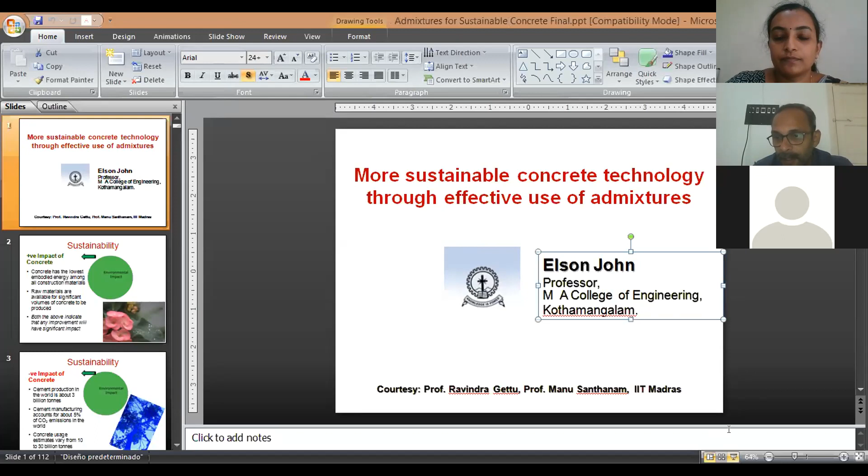Okay, thank you, Babila, for your kind words. Respected head of the department, Manju George, all other dignitaries present, and dear participants. Let me first thank MBITS College, Kothamangalam, for giving me an opportunity to interact with you. I was always in contact with MBITS for many such programs, and I do appreciate the Civil Engineering Department of MBITS for coming up with lots of programs and innovative ideas to develop knowledge in the civil area. I personally congratulate the Civil Engineering Department and the head of the department for the same. I know it's not only because of the HOD alone that we can do something, there's a team behind this, so I congratulate all the faculty of the Department of Civil Engineering for that.

So last 3 days you've been talking about sustainable development, right? Whenever we talk about civil engineering, everyone is talking about sustainability now. What is sustainability? You are already very well aware of it, so I'm not going to go much into that. During these interactions you might have known that sustainability has 3 sides or 3 components. Let us see how concrete affects these 3 components. It's a big challenge for me to keep you awake till 3:15 p.m. today after lunch, so in between I can see your names and some are very familiar to me, so I will ask some questions. If you are not responding, I will call your names.

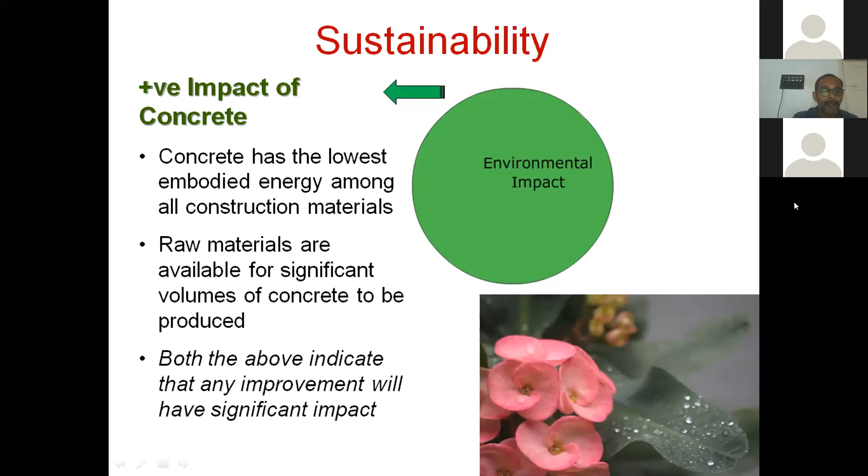So how can these admixtures help in achieving this? That's the discussion today. Then, what is the negative impact of concrete on environment?

As all of you know, cement production will lead to a lot of environmental issues. Cement production in the world is around 3 billion tons. And cement manufacturing accounts for about 5% of CO2 emissions in the world. Almost 1 kg of cement will produce 0.8 to 0.9 kg of carbon dioxide. So that much carbon dioxide is produced.

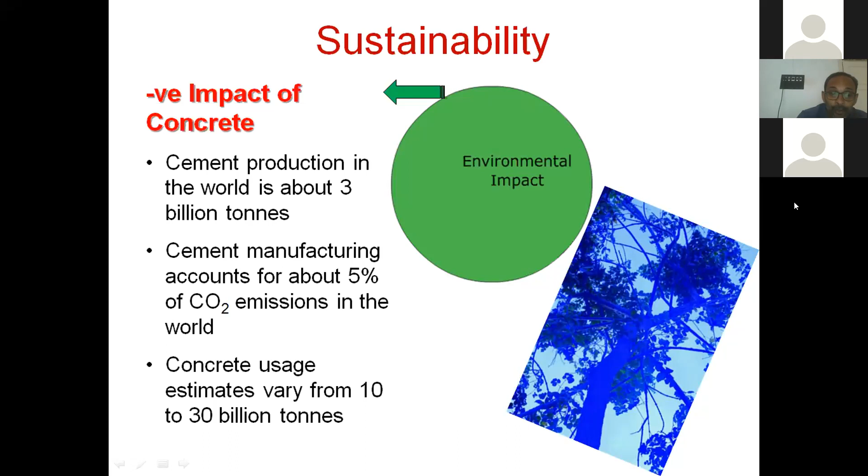So if you can reduce the consumption of cement, not only can we save the raw materials, but we can directly reduce the emission of carbon dioxide to the atmosphere. So that can lead to environmental issues. How that can be possible? Let us discuss. Then, concrete usage estimates vary from 10 to 30 billion tons per year.

Now let us come to the economic part. What is the positive impact of concrete on the economy? Construction provides livelihood to a large percentage of the population. Almost all our houses are made of concrete, or wherever we are thinking about infrastructure, we need concrete. So that is a positive impact—it gives livelihood to a large percentage of the population.

Then the growth of construction cost is also reasonable. Only 3 to 4% of construction spending is increasing per year.

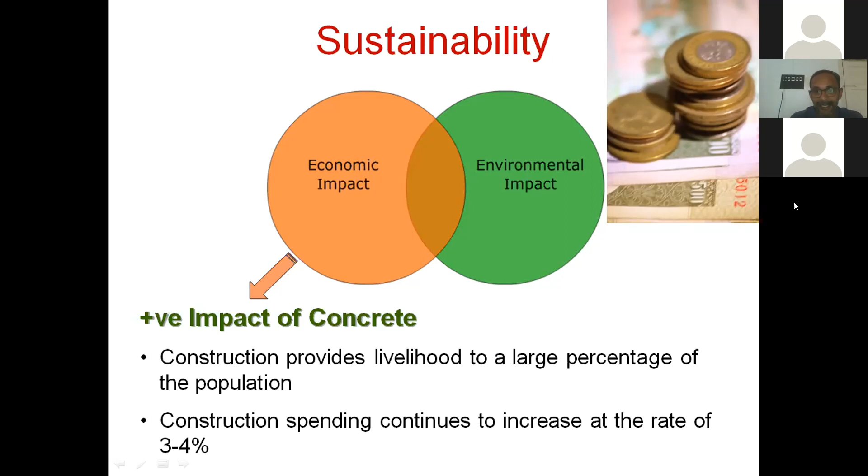Now, what is the negative impact of concrete? Poor construction with concrete can lead to high repair and rehabilitation costs. That we are seeing always in our structures. Almost all the structures we are facing difficulties or problems with.

We are designing a bridge for 100 years, or claiming that it will be sustained for 100 years. And we have an example in our neighborhood itself - a bridge was demolished after just 2.5 years of life cycle.

Why is that? There are lots of factors behind it. I'm not going to give examples or details about it. It may be the design, it may be the materials, it may be the methodology we followed for construction or construction techniques, but poor construction leads to a lot of repairs.

If we look at concrete structures, within a few years itself we are seeing a lot of cracking, spalling, all these things. Concrete is a durable material, no doubt about that. But we are making the concrete less durable and causing our structures to corrode, spall, and fail. So that is a negative impact.

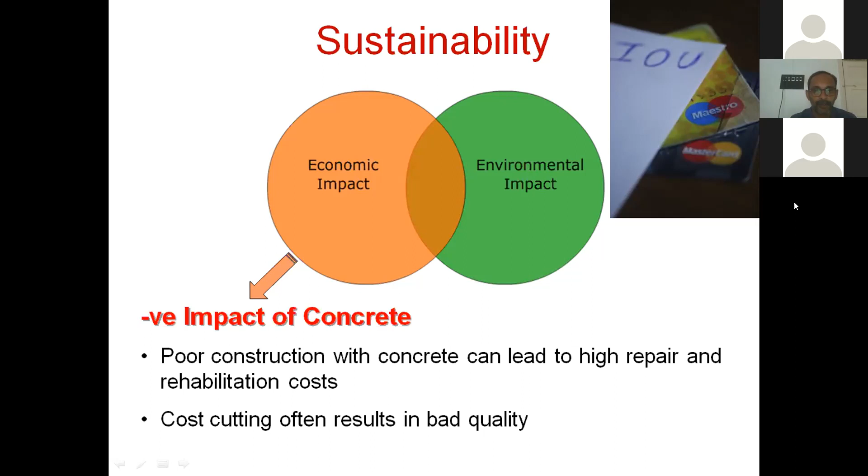Now, coming to social impact, the positive side - concrete is a long-term investment that is within reach for most. We are making structures. We have ancient structures which have withstood 100 or 200 years without any damage. And still, we can design a structure with a black and white guarantee that it will last long for 100 years. We can give that guarantee. There is a design procedure for that.

Life cycle prediction of structures - we can say that if the concrete has this much quality, the building will sustain for 100 years. Normally, the buildings we are designing for 50 or 60 years.

And how is durability ensured in our structure? Our IS code gives some points for that: minimum cement content to be used, maximum cement content to be used, maximum water-cement ratio to be followed, minimum grade of concrete to be used for various exposure conditions, and the clear cover. These are the things mentioned in IS 456 for making the structure durable.

But is it sufficient? If you follow this, it is sufficiently good. But if you are going for 100 years of life span for a structure, is it sufficient? It is not. We are specifying for a beam a clear cover of 25 mm. Why is it specified as 25 mm?

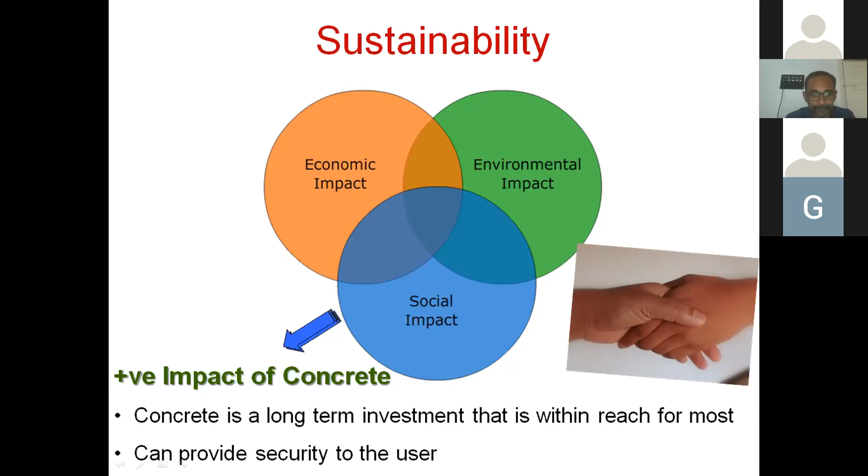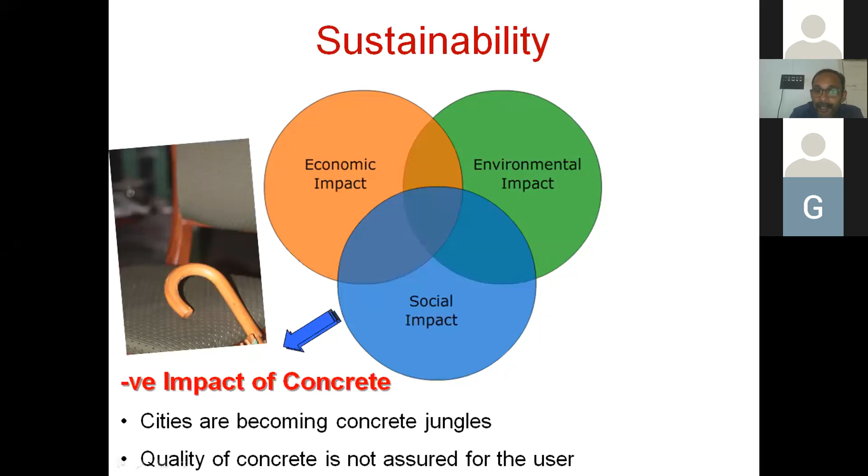So it can provide security to the users. Then what is the negative impact of the social component? Cities are becoming concrete jungles, as you can see in almost all our modern cities. During a sunny day, the concrete will absorb the heat and release it, so the temperature also increases a little bit. Then again, quality of concrete is not assured for the user. So that led to lots of issues in the concrete.

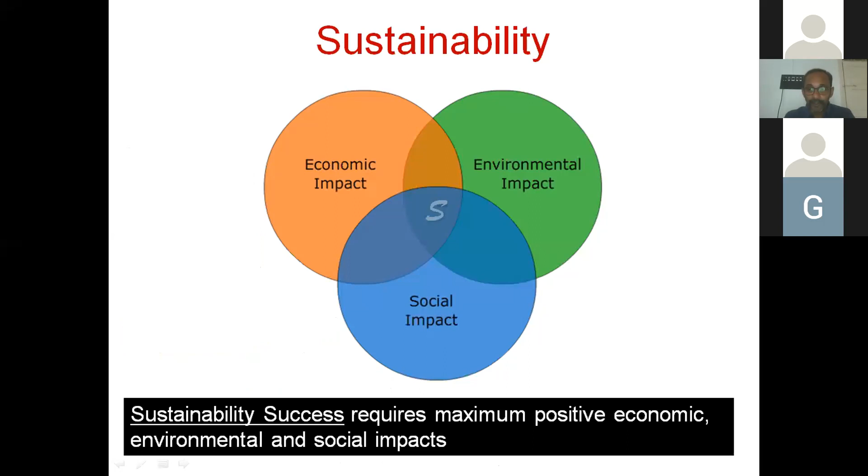So sustainability success requires maximum positive economic, environmental, and social impact. All these positive impacts should be the maximum. So the simple principle for concrete construction for sustainability is use less raw materials and energy over the whole life. So can anybody say how you can reduce the raw material for concrete by using an admixture? Anybody, if you can suggest? Okay, we don't want to spend time, I will tell.

So, for example, we are designing a column with M20 grade of concrete, and we get a cross-sectional area. At the same time, if we design the same column with M60 or M50 grade of concrete, we will arrive at a lower cross-sectional area. There should be some minimum dimensions for all those. But for multi-story buildings, if you want to make a high grade concrete, we need low water cement ratio and filler or supplementary cementitious material. So those are the admixtures.

So designing the same column with M60 grade of concrete, we can reduce the area by 1/3. So we need only 1/3 of concrete. That gives a saving in the raw materials, energy to mine it, process it, transport it, mix it, place it, all the things. We can go for a reduced cross-sectional area with the help of admixtures. Then reduce the emissions: when you reduce the quantity of material, we can reduce the carbon dioxide emission, because we need only 1/3 cement.

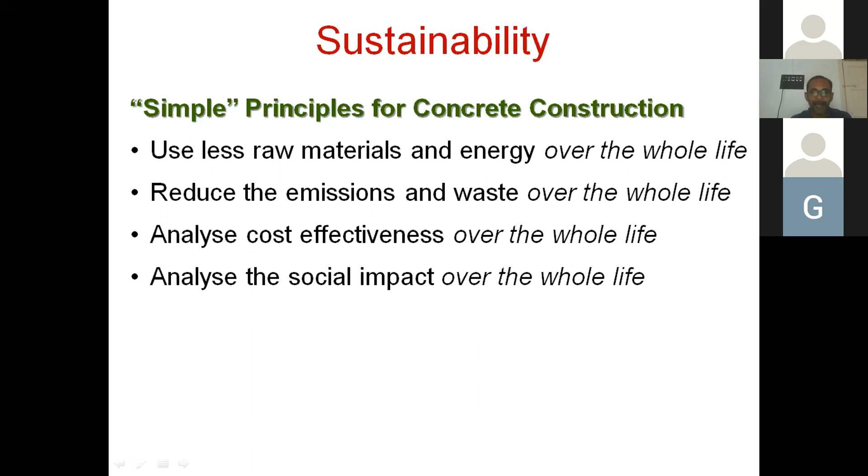Again, when you are going for a bigger cross section, after the useful life of the structure, we want to demolish it and dump the waste somewhere. So again, that needs more energy, space, and creates problems. When we talk about sustainability, it should be over the whole life of the structure, not the initial cost. Then analyze cost effectiveness, then analyze the social impact factor as we discussed earlier.

Use less clinker and water and more waste material. I told you how we can reduce the clinker. Go for high strength concrete. And for normal concrete, M20 concrete, our practice in Kerala is to use around 360 to 400 kg per m3, where you can use 200 or 220 kg of cement and 80 or 90 kg of fly ash to get M20 grade of concrete. So what is the advantage?

The raw material for cement manufacturing can be saved. The energy required to produce the cement can be saved. Transportation, everything can be reduced. And at the same time, we can effectively use a mineral admixture or an industrial waste material to make the concrete. So we can reduce the consumption of raw material, reduce the carbon dioxide emission, and use a waste material. Otherwise, that will go for landfilling.

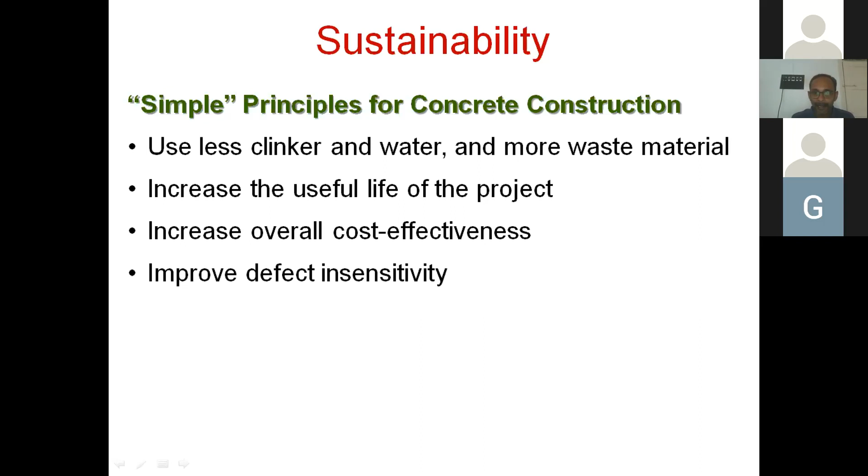That can lead to dust, and the heavy metals can leach to the groundwater and contaminate it. So air, land, and water pollution can be avoided. Then increase the useful life of the project. That's what I told you. Instead of 50 years, you have to make a structure which will withstand 150 or 200 years. Then overall cost effectiveness, of course, we have to consider. Then improve the defect insensitivity. Our structure should be intact and without any defects.

So admixtures in concrete. The time is flying, so I will just give you only the important points. So what's an admixture and why do we need it? To get sustainability in concrete, we need high quality concrete. High quality is not only high strength, but high performance also. We can achieve this by using alternative or unconventional materials because the industrial requirements are changing nowadays.

Earlier, we were talking about 50 or 60 mm slump because concreting, placing, compacting, finishing, everything was manual. Now we are talking about ready-mix concrete. Your concrete is a call away, so it needs to be transported. But with the present traffic conditions, you don't know when your concrete will reach your site. Sometimes it may take 3 to 4 hours. So your concrete should be workable till that time without the initial set. So workability retention or slump retention, or sometimes we need high strength concrete.

Last year, one guy from a prefab unit came to me, and his demand was to get 20 Newton per mm square in 12 to 18 hours. I told him it's very easy. We can get it within 4 to 6 hours if you go for high quality accelerated curing techniques. But he told me that he doesn't want to go for a boiler and all those things. He wants to do it with admixtures. Can we do it? Yes, we can.

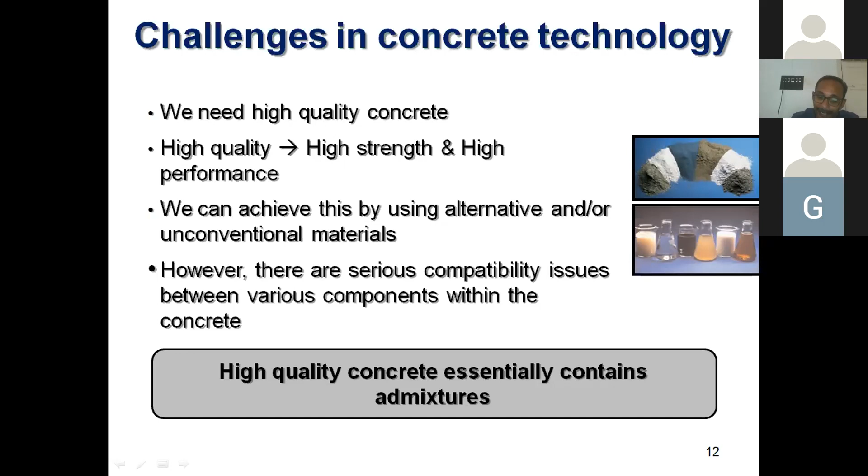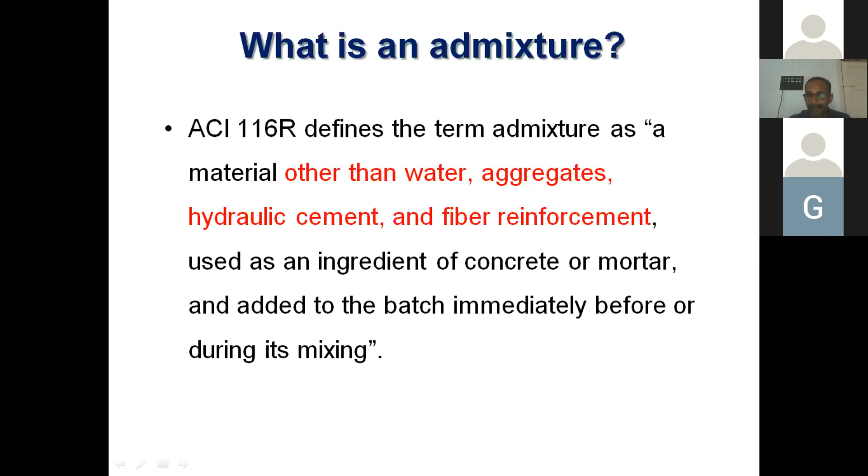We can make sure that for high quality concrete, high grade concrete, high performance concrete, we can enhance the service life of the structure. And that can be achieved with the help of admixtures. What's an admixture? According to ACI, the term admixture is a material other than water, aggregates, hydraulic cement, and fiber reinforcement used as an ingredient of concrete or mortar and added to the batch immediately before or during its mixing. No admixture should be added to the concrete once the concrete is prepared. It should be added immediately before or during its mixing.

Why use an admixture in concrete? To satisfy the growing demands of the society and the construction sector, to provide better stability under certain environmental conditions. Say you want to go for underwater concreting. You want your concrete to be more cohesive. You don't want the surrounding water to mix with your concrete. So you can go for a viscosity modifying admixture so that the cohesiveness of the concrete will be better and the surrounding water will not mix with the concrete. Like that, lots of admixtures are there. To increase the productivity or efficiency during fabrication, transporting, and placing. The capacity of the traditional materials to satisfy these demands is limited.

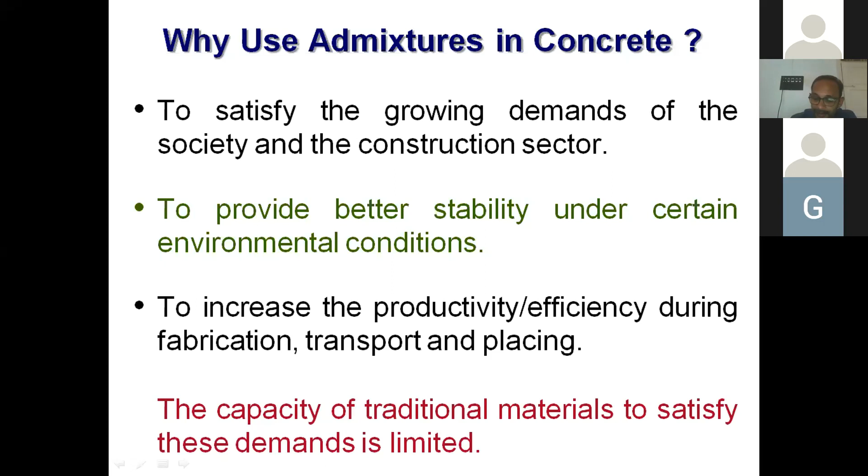So admixtures can be broadly divided into two. One is chemical admixture and the other one is mineral admixture.

I'm not going into detail about it because I want to wind it up within 15 minutes. So as per the restricted time, I am just rushing.

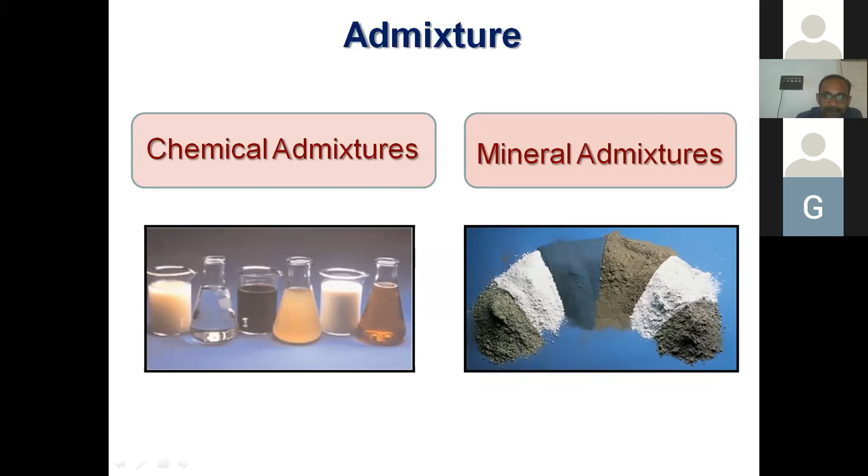Chemical admixtures, all of you know what a chemical admixture is. Chemical admixtures are chemicals which are added to the concrete to improve some of the properties of the concrete. Normally the dosage is less than 5% or maybe 2%. I always tell that the process of making concrete is just like cooking. We are making a dish, say veg kurma. You are cooking that at home, your mother is cooking, you are getting it from your canteen, you are getting it from a different hotel. But each of these will taste different. What makes the difference? The relative proportion of the materials.

Just like you are getting the raw materials of the concrete from the same source: from the same quarry you are getting the aggregate, the same brand of cement from the same batch, the same source for the water. If you are mixing from the same raw material, different manufacturers or designers can make the concrete in different ways with different quality, as our dishes taste different. So first importance is the relative proportions. And sometimes in our dish, if you want to add some taste, we use some spices. So admixtures in concrete are just like adding spices to improve some of the properties of the concrete.

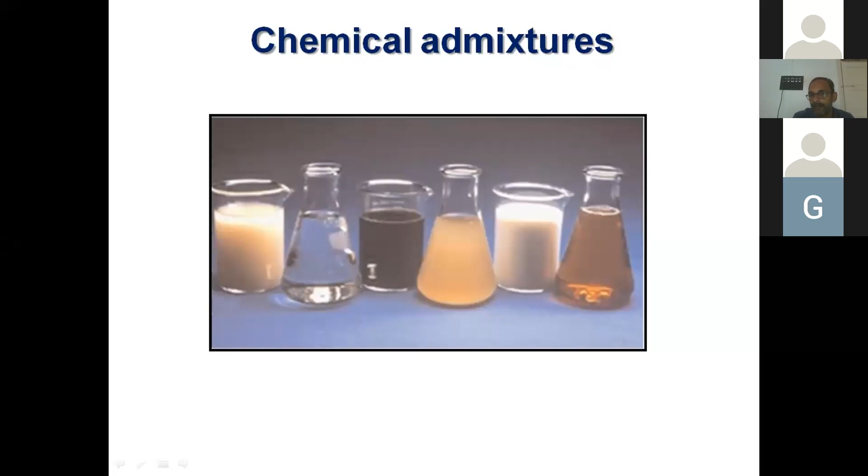When I'm talking about superplasticizer, it is just like adding salt to your dish. Without superplasticizer, you can't think about a quality concrete nowadays. But one thing you should be very careful about. If you add excess salt, what happens? You can't use your dish at all. You can't eat it. Same way, overdosing of admixtures can lead to segregation and bleeding in concrete. That is dangerous. If you add less salt to your dish, it won't taste good. Just like if your admixture is not of sufficient dosage, it will not work as we expect.

So when you are using admixtures, you should be very careful, because these admixtures are used for some purpose. Maybe it is to improve the workability; superplasticizer is added to improve the workability. Sometimes these admixtures have some secondary effects. Most superplasticizers will have a tendency to increase the setting time. We should be aware of that: how this admixture will influence the required property and how it can interfere with the other properties. That's all.

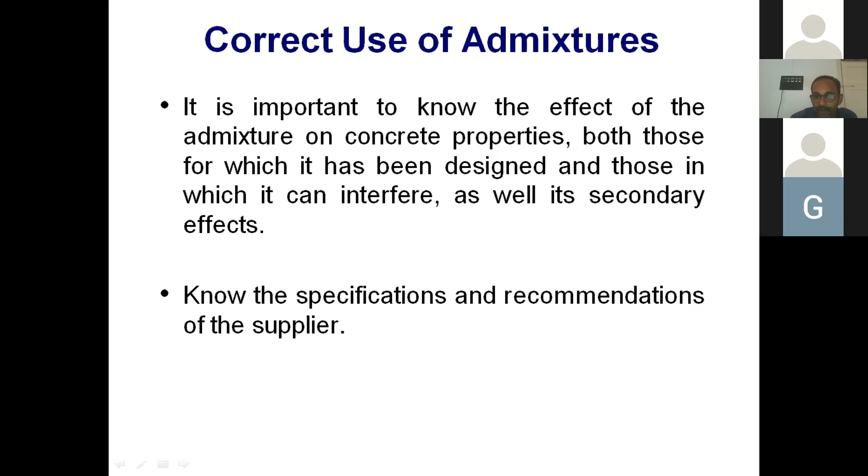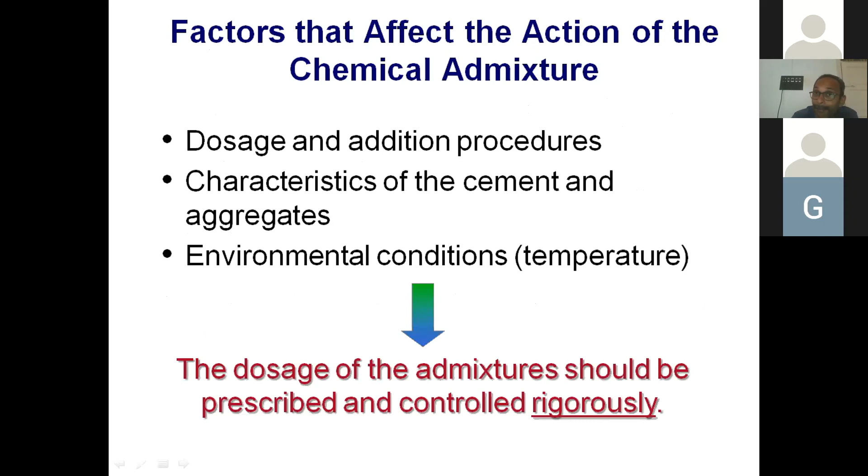So factors that affect the action of the chemical admixtures are dosage and addition process, characteristics of the cement and aggregate, environmental conditions. So the ambient temperature can influence the performance of the admixtures. So chemical admixtures, we can broadly classify into many groups. One is admixtures that mainly affect the fresh stage, water reducers and superplasticizers. I will talk about that two minutes later because that's the most important thing.

Then admixtures that mainly affect the setting stage. You can control the setting time of concrete. Sometimes you want to concrete underwater. So what you need is you want your concrete to set fast. Or you want to make your concrete in a cold climate. So temperature is an accelerator of the hydration reaction. So low temperature will decrease it. At lower temperature, concrete will not set for a long time. So that time you need to accelerate the setting. We can go for set accelerators.

Or you are going for prefabrication. You need your formwork to be removed early. You can't keep your formwork for 28 days for the next specimens to come. So we can go for set accelerators. Set retarders: you want to transport your concrete for a long time. You can use this admixture so that you can make your concrete workable for a long time.

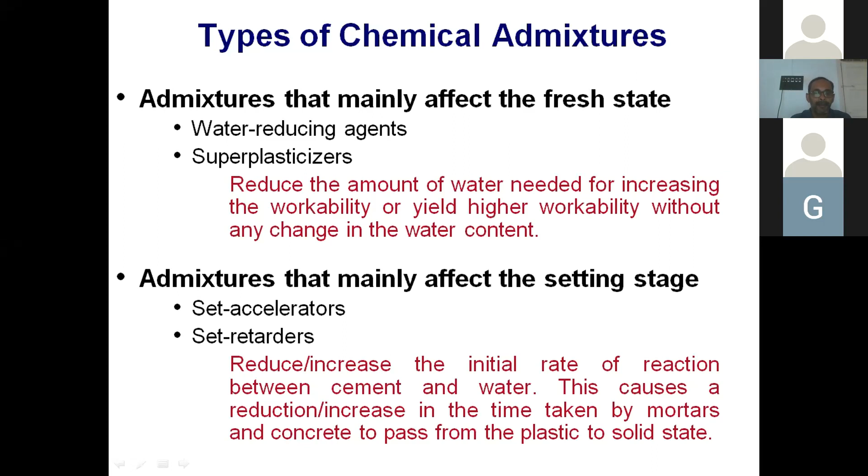If the ambient temperature is too high, concrete will set fast. You will not get sufficient time for the concrete to place and finish. We can go for a set retarder so that the setting time of the concrete will be delayed. You will get sufficient time for the concrete to place and finish.

Admixtures that mainly affect the hardening stage. I told you, we need a compressive strength of 20 MPa in 12 hours or 18 hours. We can go for hardening accelerators. Accelerators will only decrease the setting time. They will not increase the strength. But when you are going for a hardener, it will increase the initial strength.

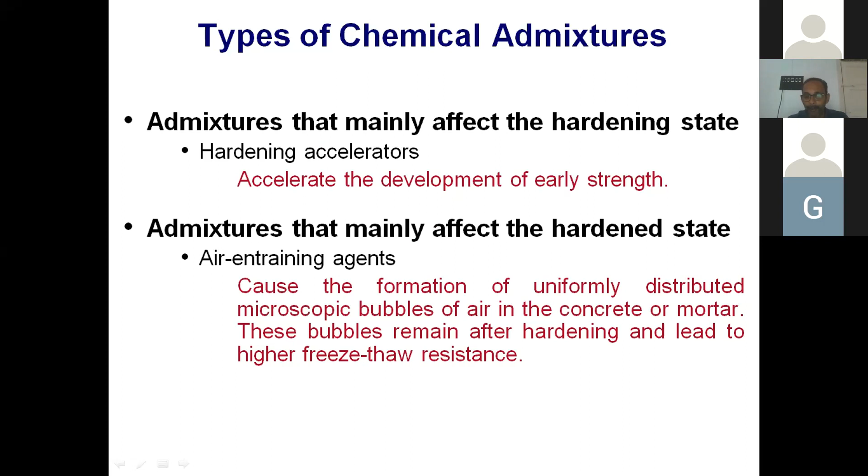Then admixtures that mainly affect the hardened stage, air entraining agents. They will entrain some air inside the concrete so that it will have better freeze-thaw resistance. I'm not going into details of that. In India or Kerala, we are using this air entraining agent to make lightweight concrete. What we are talking about, the AAC blocks and all, are air entrained concrete.

There are special purpose admixtures, shrinkage reducing admixture. So all of you know that concrete has a unique property of shrinkage. Even if it is protected from the atmosphere, it will shrink because of chemical shrinkage. In the hydration reaction, the volume of reactants is more than the volume of the product. So that can lead to shrinkage. So shrinkage is happening because of the removal of water from the pores. So this admixture will reduce the surface tension of the water so that removal of the water will be easy and it will reduce shrinkage.

Like that, we have alkali aggregate expansion reducing admixtures. We don't have such problems in India, but in some countries they are having a big issue with that. Then corrosion inhibitors. If you're adding these admixtures, they will make a passive layer on the surface of the reinforcement bars so that the entry of oxygen and moisture to the reacting sites will be prevented and the reinforcement will be protected against corrosion. That is one way of action. The second type of admixtures will prevent the entry of moisture into the concrete so that the reinforcement will not corrode. Then viscosity modifying agents, I already discussed.

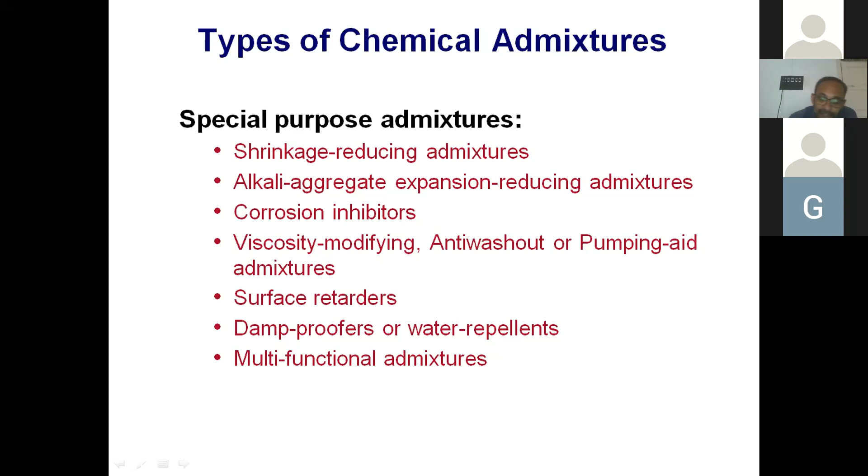Surface retarders. If you want to get an exposed aggregate finish, you just apply these surface retarders on the formwork, do the concreting, keep it for sufficient days. Only the surface mortar will not set. After removing the formwork, clean the surface with a jet of water, and you will get an exposed aggregate surface. Damp proofers or water repellents: micro or nano materials will be added. The purpose is to make the surface of the concrete just like a lotus leaf, so that durability issues can be reduced. Then multifunctional admixtures: one admixture will serve more than one purpose.

So superplasticizers, why are superplasticizers added to concrete? There are different ways to approach it. One, you have a concrete, say your concrete has a 50 mm slump. You want to increase this slump. So you can add a superplasticizer so that you can make this slump 100 or 150 or 200 mm. So, to increase the workability. But if I have a concrete with 100 mm slump, I am satisfied with that.

So if I am adding an admixture, superplasticizer, what will happen normally? The slump will increase, but I want only 100 mm slump. So for the same slump, I can reduce the water content or water cement ratio so that the workability will be the same. So for the same water content, we can increase the workability. Now for the same workability, we can reduce the water cement ratio.

So when the water cement ratio is reducing, what happens? We know Abrams' law: strength is inversely proportional to water cement ratio. When the water cement ratio is reducing, the strength will be increasing. So for the same cost, we will get a high strength concrete at a little additional cost of admixtures.

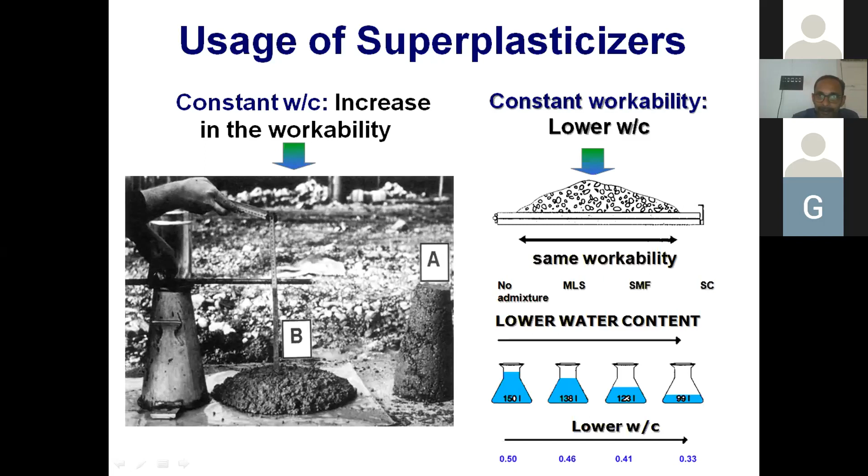When you are reducing the cement content, what is the advantage? The cost will be reduced, leading to sustainability. The production cement requirement is reducing so that carbon dioxide emission is reducing. Again, sustainability. The raw material required for the cement is reducing. Again, sustainability. So we can make the concrete more sustainable.

So mechanism of action, I am not talking much. Again, consequences of superplasticizer usage: it reduces placing and compaction time, leading to lower construction cost. Construction cost can be reduced. It facilitates casting of elements with complex shapes and dense reinforcement.

Otherwise, the reinforcement will not have sufficient workability. For example, self-compacting concrete will fill the complex shapes. Otherwise, there will be lots of honeycombs that can affect the durability, failure of the structure, and that can lead to less sustainability. It also improves surface finish.

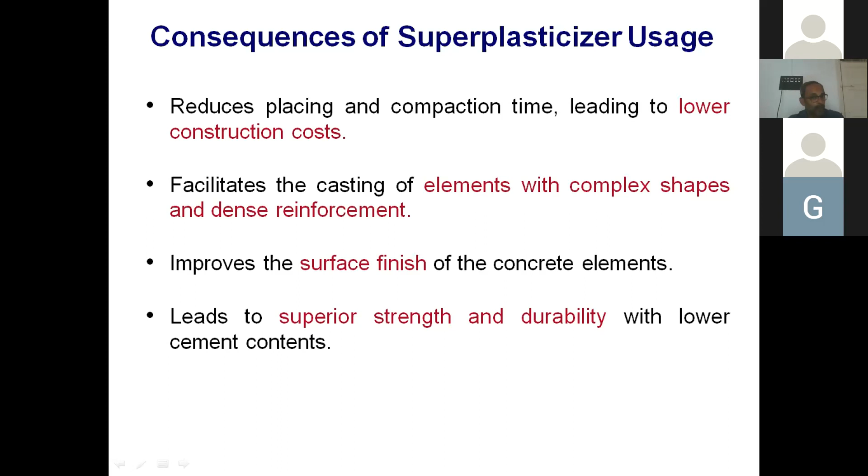Superior strength and durability. How is superior strength achieved? Because of the lower water cement ratio. How will durability be improved? That will be explained by this figure.

So what happened? Some part of that water will be taken for hydration. The remaining water will remain as water itself in the pores. When it is exposed to the atmosphere, this water will evaporate, leaving pores inside the concrete. All the detrimental components, chloride, moisture, oxygen, everything will percolate through that porous structure, reach the reinforcement, and corrosion will take place. Or the cement matrix will be deteriorated because of sulfate attack and other issues.

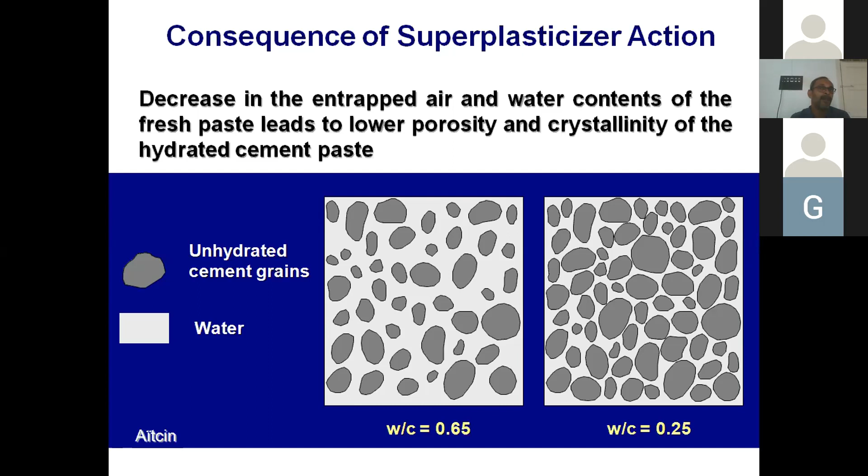So when that permeability is reduced, the durability of the structure is increased. When the durability is more, the structure will become more sustainable. So these parts I am skipping - how the superplasticizer can help make the structure sustainable. A more uniform and homogeneous mix gives you better performance in terms of workability, strength, durability, constructability, everything.

Improved durability aids the use of waste material as mineral admixture or supplementary cementitious material. It also increases tolerance of non-ideal aggregates and improves working conditions at the construction site.

For example, if you are using self-compacting concrete, you need not vibrate the concrete at all. So that improves the working condition to a great extent because there is no vibration. When you are vibrating the concrete, we are vibrating all the laborers or workers standing on the formwork also. That can affect their health.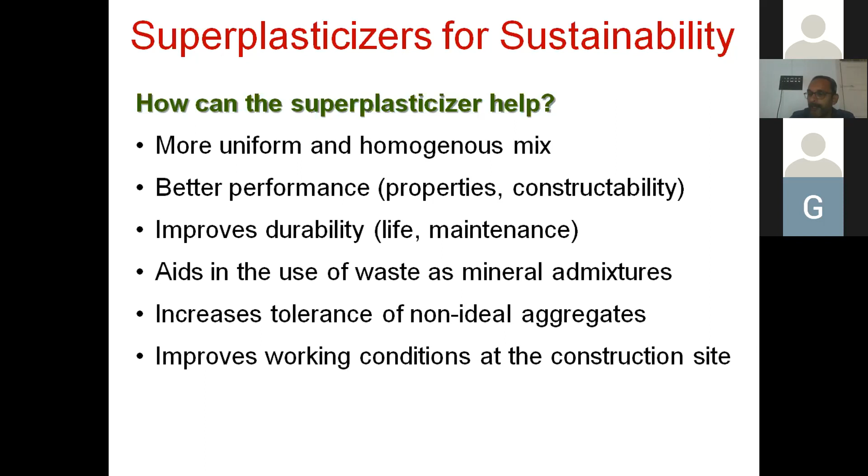The person who is operating the vibrating machine can be affected by the vibration. It also produces noise that can affect the health of the workers. So this is only an example; there are many other examples. Because of the lack of time, I'm just going fast.

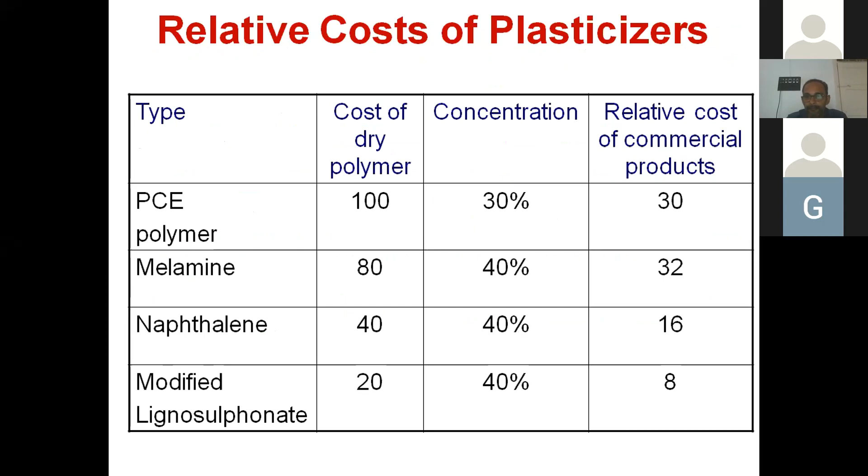I just want to talk 2 minutes about mineral admixture. There are different types of cements available in the market - OPC, PPC, PSC and all those things. Normal doubt for all civil engineers is which is best. Many times people believe, or even civil engineers believe, that OPC is best because we are using cement.

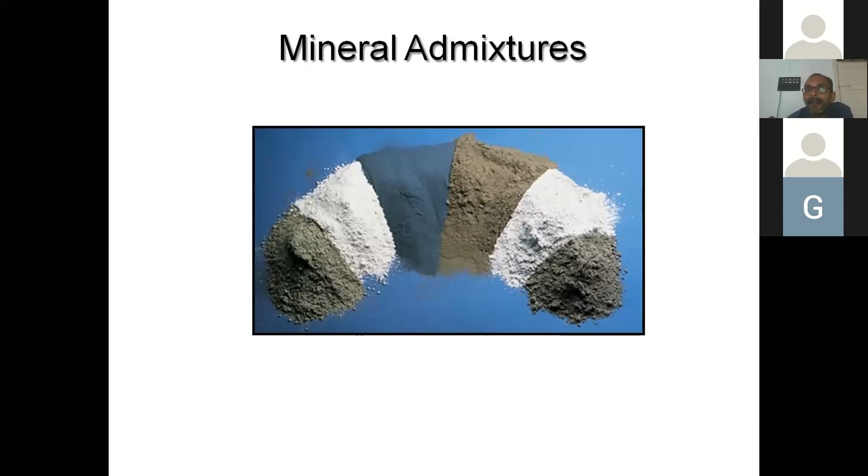In PPC, we are adding some fly ash. In PSC, we are adding some slag. These are waste materials. But in reality, these mineral admixtures will make your concrete much better and durable. I will tell you how.

So actually, these are the cement hydration reactions. We know the Bogue compounds C3S, C2S, etc. If you forget it, don't worry. The cement will react with water to produce calcium silicate hydrate and calcium hydroxide. The calcium silicate hydrate gives you the binding property, whereas calcium hydroxide is crystalline and does not give any binding property.

Sometimes it will leach out. If your concrete is in contact with water, you can see some white patches on the surface - that is the leaching of calcium hydroxide. When it leaches out, it will leave pores inside the concrete, and through those pores, all the detrimental components will go in.

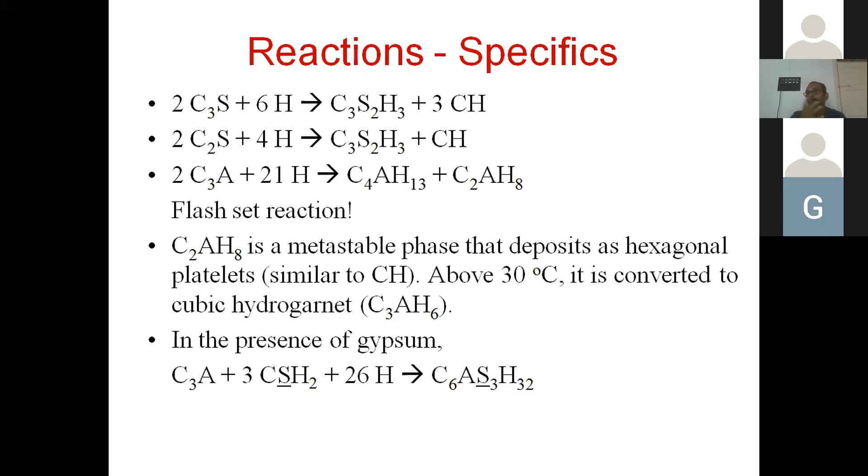So when you are adding a mineral admixture, it has reactive silica or alumina. This silica or alumina will react with the calcium hydroxide, which does not give much binding property, and will produce additional CSH, which has binding property. So we will have more CSH, more binding will take place, and this CSH will fill the pores of the concrete, making it more dense and more durable.

So the only problem is when you are using pozzolanic material in concrete - I'm telling you durability will be more because more CSH is there. But when you add pozzolanic material, one drawback is that first the calcium hydroxide has to form from the reaction of water with cement, then that calcium hydroxide reacts with the mineral admixture. So these reactions are a little slow. But how much lag there will be depends upon which type of admixture you are using.

If you are using rice husk ash, it will take only 1 day. For silica fume, only 1 to 2 days. For class C fly ash, 3 to 7 days. For class F fly ash, 14 to 28 days. For slag, it is 3 to 7 days. These are taken from Taylor's textbook, so don't worry if you're not getting exactly these values.

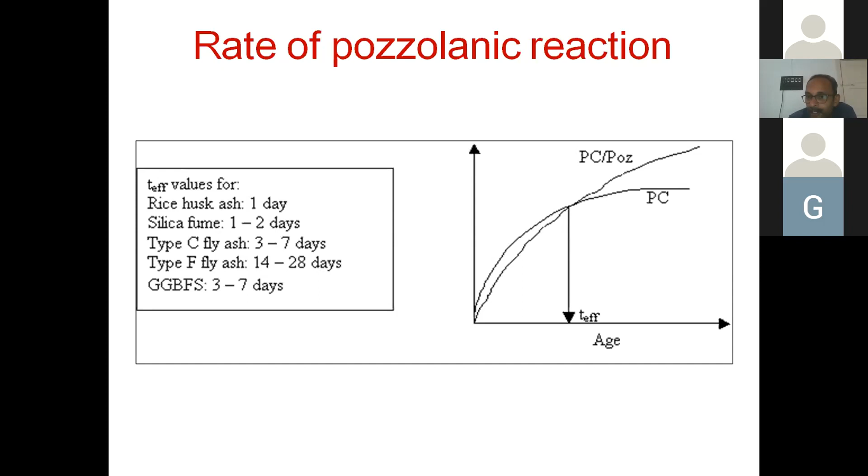These things I'm just skipping as the time is limited.

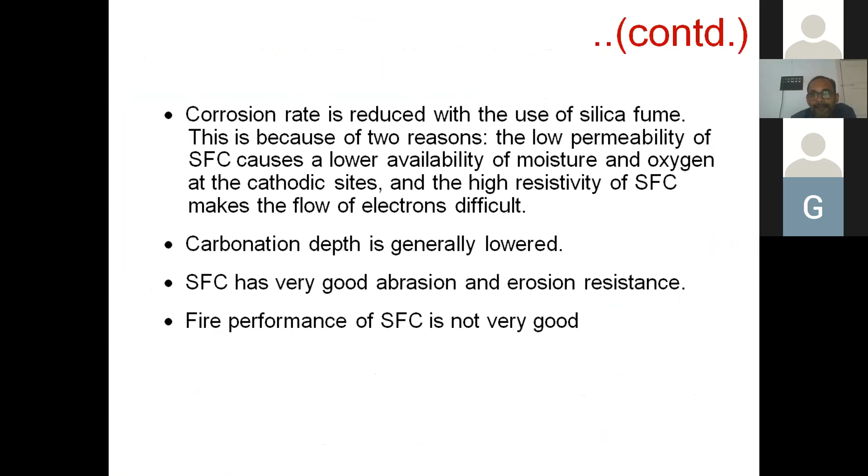I think Manju, it's our time, right?

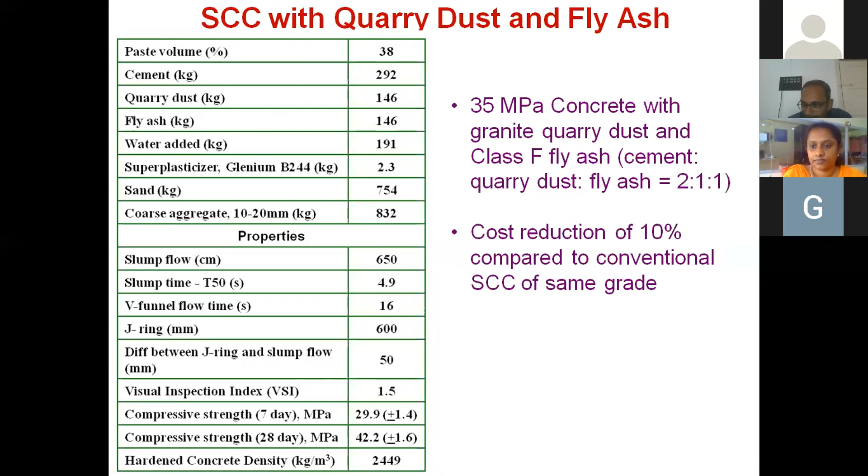Again, for sustainability, if you want, you can go for self-compacting concrete so that everything will be better. Then if you want, you can go for colored concrete, because if you want to repaint your concrete, that will take additional cost, time, raw materials, and energy.

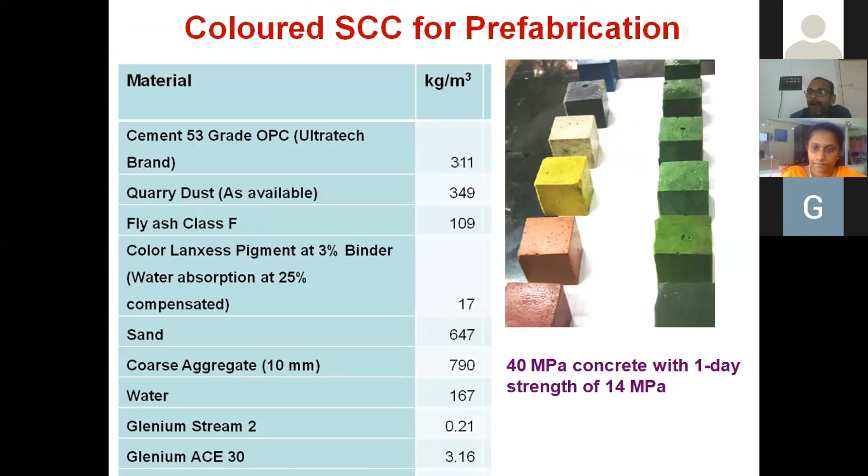So again, if you are going for a steel structure, its embodied energy is too high. You need to repair it, you need to repaint it, all these things. If you make colored concrete, you can keep it there and forget about it.

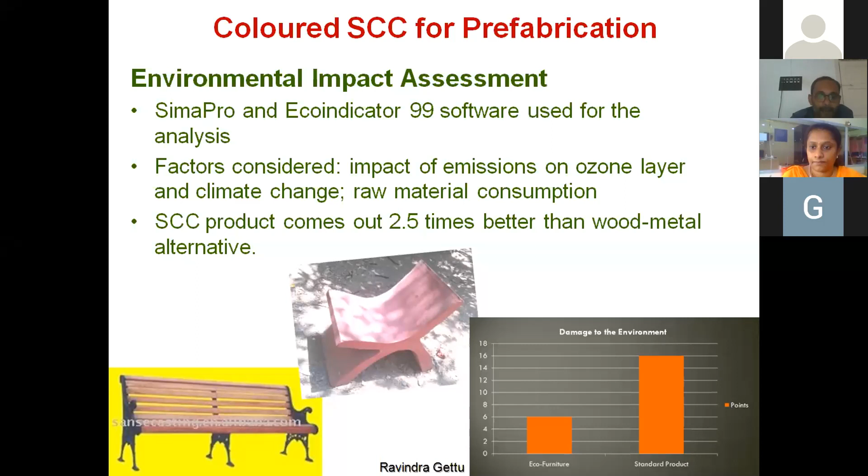If you want, we can make it with 100 years of life cycle. That's possible. Again, for durability, when you are going for blended cements, you can see that concrete without mineral admixture and with fly ash PPC have almost the same compressive strength.

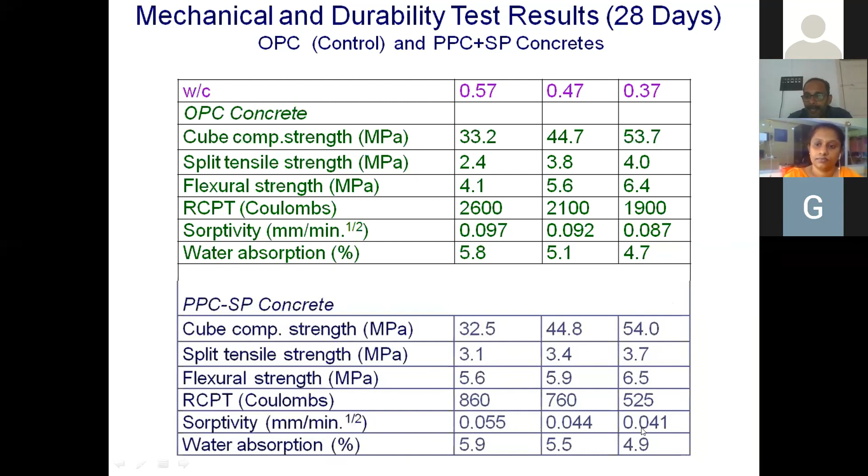Flexural strength and splitting tensile strength are a little higher. But look at the RCPT value and sorptivity value. The values are much reduced for cements with fly ash. That means the durability of the concrete is much higher with blended cements, just like gravimetric loss and all those things.

So with this, I would like to show that a judicious use of admixtures can contribute significantly in making sustainable structures by reducing raw material, reducing consumption of construction materials, reducing emission, using industrial waste materials that otherwise would cause pollution issues, and reducing cost. All this can be achieved, and we can make a more durable and sustainable concrete with judicious use of admixtures, and the life cycle of the structure can be increased significantly.

With this, I'm winding up. If you have any queries, we can take some queries for some time.

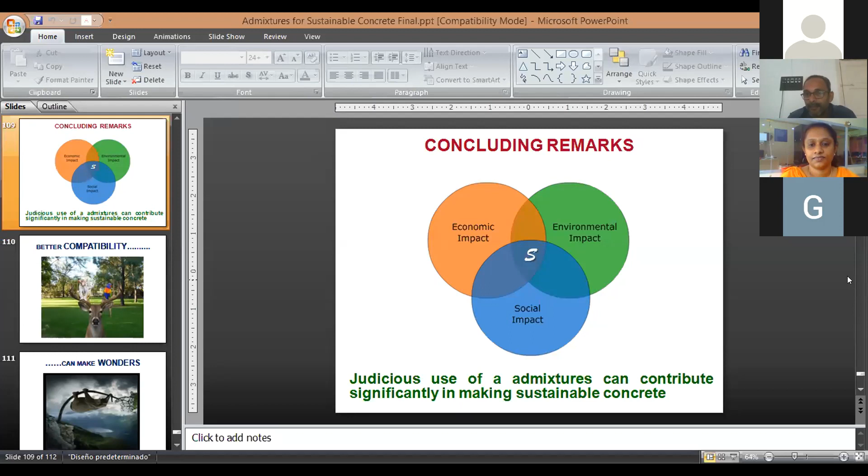Sir, one question is, what are the possible drawbacks of chemical retarders in structures? I couldn't find any negative influence of that, because whenever you are using it, it's for a purpose. Applications where we need long haul or hot weather concreting, all these things, we are using it for the advantage.

Okay, but the problem is that if you are overdosing, you have to design your concrete accordingly. If you overdose, your concrete may not set at all. I came across such issues where at a building site the concrete didn't set at all for 2 days. So on the second day they contacted me, and we went there and saw that the concrete had not set.

So I asked them about the procedures they took, and then I asked them to wait 28 days before demolishing. I said if it gained strength after 28 days, we could do non-destructive tests as well as take cores from the sample and assess whether to demolish or not. After 28 days, everything was perfect.